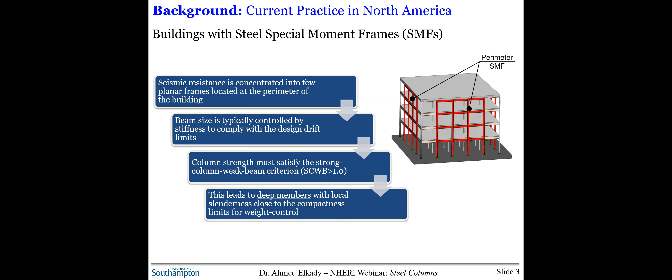Now, these column cross sections typically have depth larger than 16 inches. So we typically see W24s and W30s. And these all have large in-plane moment of inertia, as we want. At the same time, to economize on the steel weight, we select cross sections with local slenderness close to the compactness limit for highly ductile members, as per the seismic provisions. And to give you an estimate, roughly the web slenderness would be 40, and the flange slenderness would be close to 7.

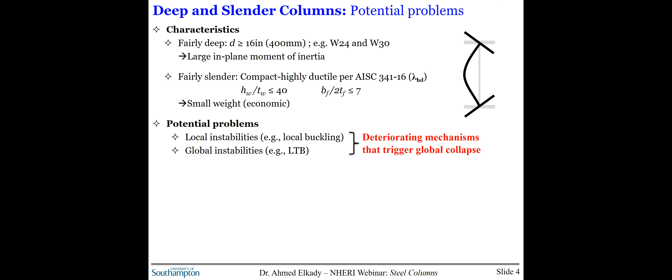Now, because of these characteristics, potential problems may occur, including local instabilities and essentially the early occurrence of local buckling and how fast it progresses. At the same time, global instabilities can take place, such as twisting and lateral torsional buckling. And these are all deteriorating mechanisms that we don't like to see, since they trigger a global collapse.

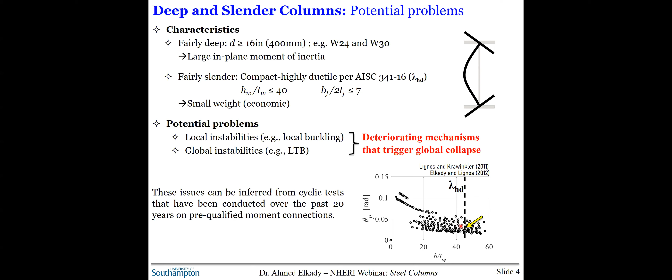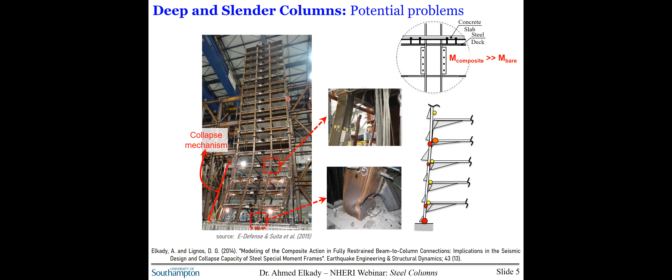In the same time, subassembly tests also showed that once the beam buckles, the lower flange tends to kick out of plane, exerting twisting and out of plane bending demands on the column. Again, this can be a critical issue given the column's geometric properties that I just mentioned.

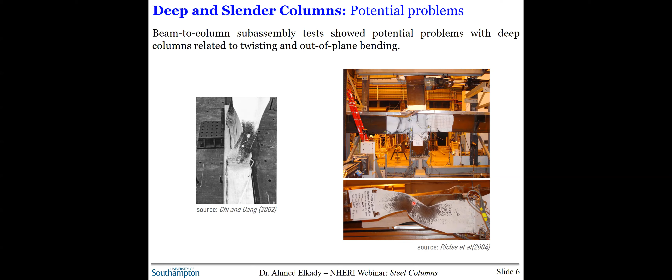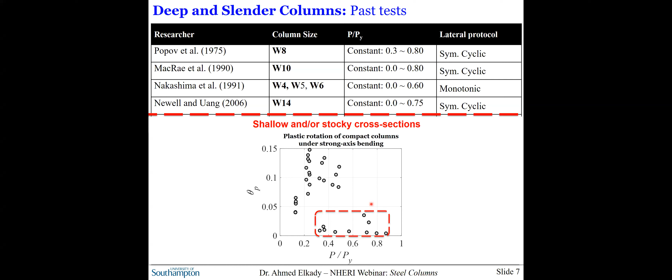In the past 5 years, there have been several testing programs on steel columns. In today's presentation, I will present the findings from 2 of those testing programs.

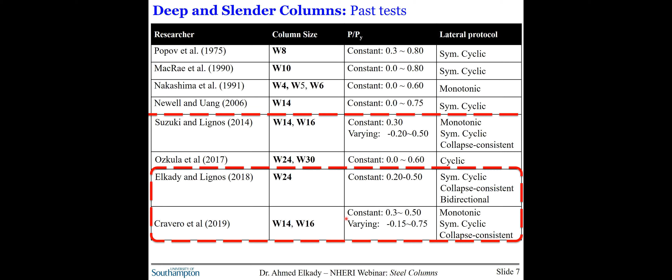Now, the research scope is essentially to investigate the cyclic behavior of deep columns through experimental testing and complementing this with numerical simulations. The specific objectives are to reassess the seismic local compactness limit, as well as the global slenderness limit for highly ductile members.

Also to develop updated force deformation relations for the nonlinear modeling of steel beam columns, and this was part of the ATC 114 project. We also would like to quantify key column response indicators, such as the plastic hinge length and the amount of axial shortening resulting from local buckling.

So the first phase of the research, and the first part of this presentation, comprises 2 testing programs, one conducted at full scale and the other at larger scale, for a total of 24 column specimens. Looking at the cross-section space for wide flanges, for the testing, we started by selecting representative column sizes. So for the full-scale testing program, based on code-compliant archetype mid-rise steel office buildings, we chose W24x146 and W24x84 to be tested.

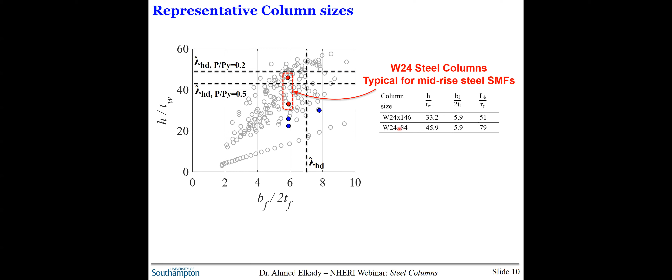For the larger scale testing, we selected 3 sizes from W14 and W16 as shown here. And these are equivalent to the moment frame columns in mid-rise steel buildings, but at a 2/3 scale. Probably you already noticed from this plot that the main geometric parameter that we are varying here is the web slenderness ratio. And essentially, we found this to be the parameter with the most impact on the cyclic behavior of the column based on an exploratory numerical assessment.

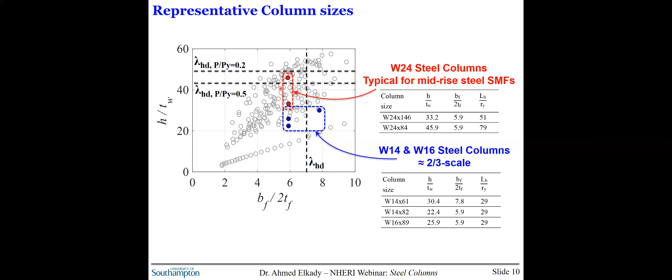Now, the dependency of structural component behavior on the loading history applied to it is already well established in literature. So in that respect, we aimed to employ a range of loading scenarios in these testing programs. For lateral loading, we applied both monotonic and cyclic lateral drifts. For cyclic loading, we used the standard symmetric ramped AISC protocol, the one typically used in literature to test different structural members and also used for the pre-qualification of beam-to-column connections.

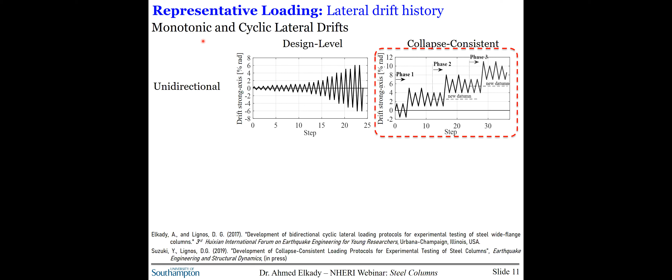Understandably, this protocol may be appropriate for drifts up to 2%, but it's not representative of drift demands at large seismic intensities. And for that reason, we also used what we call a collapse consistent protocol that represents pretty much the asymmetric drift demands under strong earthquakes that induce collapse. And lastly, based on three-dimensional nonlinear analysis, we developed equivalent bidirectional protocols shown here that statistically represent the bidirectional drift orbits using these elliptical orbits that you see over here.

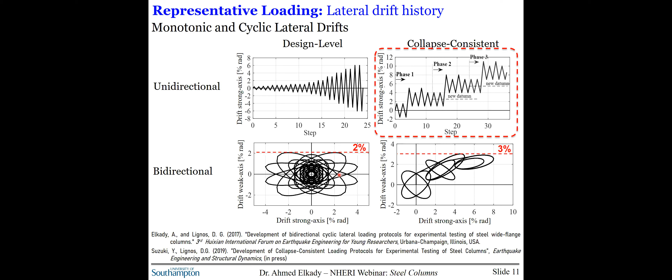Likewise, based on system-level analysis, we evaluated the column axial load demand. Essentially, if you are looking at interior columns, you will see that the axial load demand is the one induced by the gravity load, and it remains more or less constant during shaking. Typically, about 20% of the column axial yield strength, which is what we call here PY, is what you find in interior columns. If you are looking at exterior or end columns, you will see that they experience varying axial loads due to the overturning of the building. And the range of this variation depends on the seismic intensity and the building height, among other factors.

So based on this evaluation, we chose a number of constant and varying axial load ratios to employ in our test. If you look here, the varying axial load essentially includes a constant component representing the gravity offset, or what we call PG. And then you have a transient component representing this variation due to the overturning moments. And for the constant axial load, we went from 20% PY up to larger axial load levels of 75% PY, which may actually be representative of columns in older constructions.

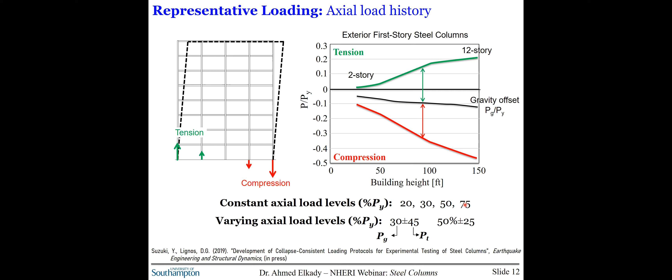A brief word here about the instrumentation. In addition to the standard force displacement acquisition that we typically do in such tests, it's worth noting that we installed a large array of strain gauges, about 54 gauges per specimen. And this is to capture the neutral axis shifting in the cross section, to track the extent of plastic strains at the column end, and also to track the location of the flexural inflection point throughout the test. We also use a wireless tracking system to measure the out-of-plane deformations and the twisting of the column along the height.

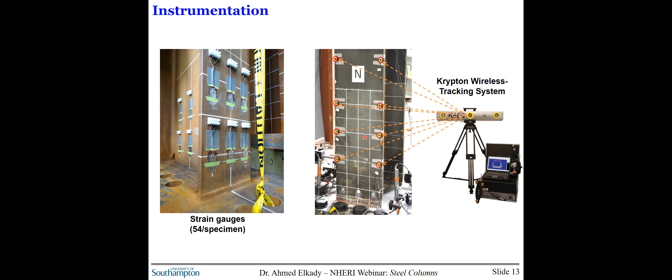In this one, we subjected the columns to monotonic and cyclic drifts. In monotonic loading, we reached large drift levels of 15%, so we can characterize the behavior up till these large levels of drifts. At the same time, the drifts were coupled with high constant and varying axial loads, reaching 75% of Py, which provided a unique data set, as I'll show later on.

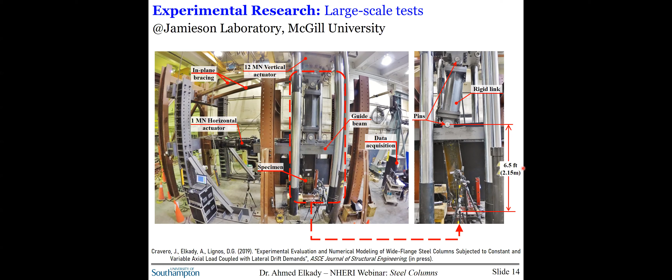In this slide, you will see a video of the damage progression in one of those tests from different angles. Essentially in this specific one, the column is subjected to cyclic symmetric drifts and varying axial load. So when we are pushing to the right, the axial force increases, and when you are pushing to the left, the axial force decreases, and in some excursions it goes to tension. Based on this, you will notice that when you go to the tension excursion, the local buckling developed in the left flange tends to straighten once you apply tension to the column.

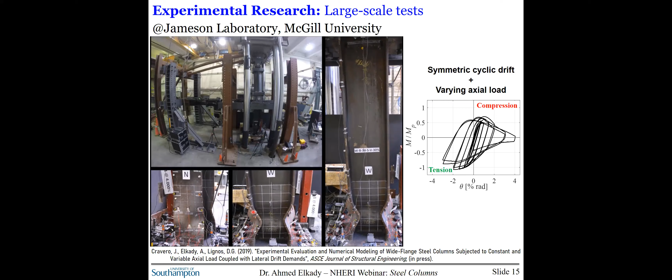The second testing program was conducted also in Canada at the Structural Laboratory of École Polytechnique de Montréal. This one involved 10 full-scale 13 feet, or about 4 meter long specimens. We were actually fortunate to use this unique 6 degrees of freedom control system that you see over here, that was brand new at the time of testing. For this, I would like to acknowledge the assistance and support of Professor Robert Tremblay of EPM and the lab staff over there.

Basically, this system consists of a total of 8 actuators connected to this top platen. This enabled us to apply bidirectional drifts at the column top and to simulate also realistic boundary conditions. As you can see here in some of the tests, we applied predefined rotation at the column top to simulate the flexibility of the top beam to column joint.

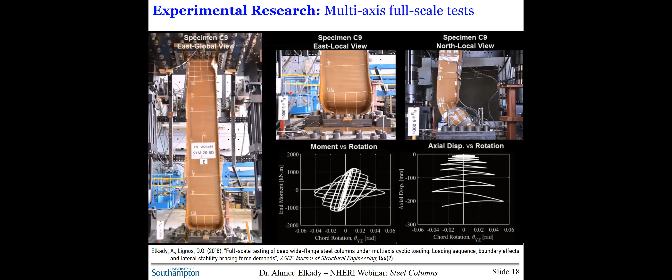This is another video of one of those columns. This particular one had W24x84 cross section and was subjected to constant axial load in compression and bidirectional drift with a flexible top end. Here you will actually see that we are controlling 4 degrees of freedom simultaneously.

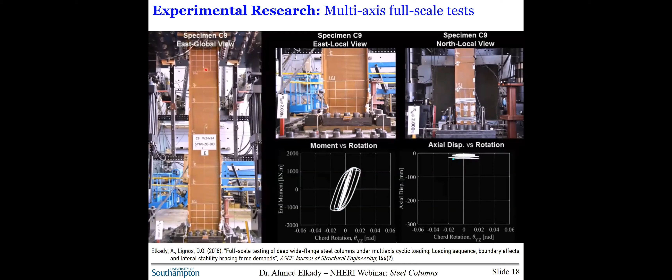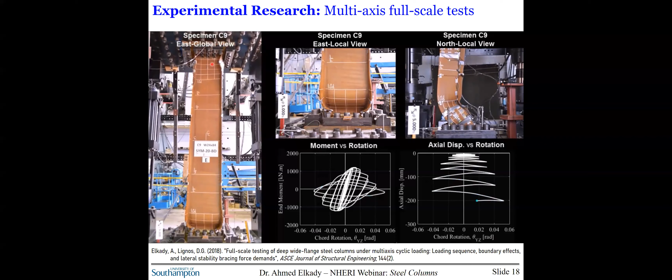What you probably will notice in this video is that the plastic deformation will form first at the column base, the fixed end pretty much. Once local buckling starts occurring at the base, which is right now, and damage starts to progress, the inflection point will start to push downward and the moment demand will increase at the top, and eventually the top end plastifies under further loading. You can also see here what's happening in the out of plane in terms of deformations and twisting.

Now, due to the time constraint, I will show you selected observations and findings from these tests, but please feel free to refer to the original publication shown here for the full details. The same applies for the rest of the things I'm showing in today's presentation.

As you probably observed in the videos, the primary failure mode is local buckling, the progression of which resulted in appreciable amount of column axial shortening, reaching around 50 millimeter or about 2 inches at 3% drift. What's more interesting is that at drifts larger than 2%, local buckling at the base plastic hinge was coupled with out-of-plane instabilities in the form of out-of-plane deformations and twisting of the member.

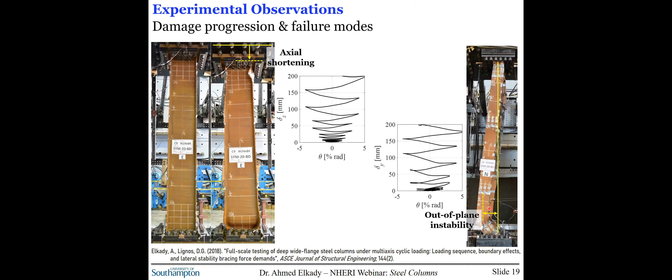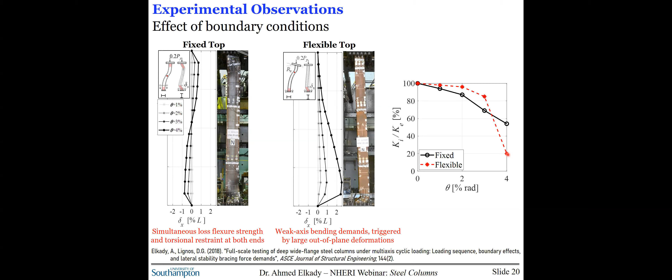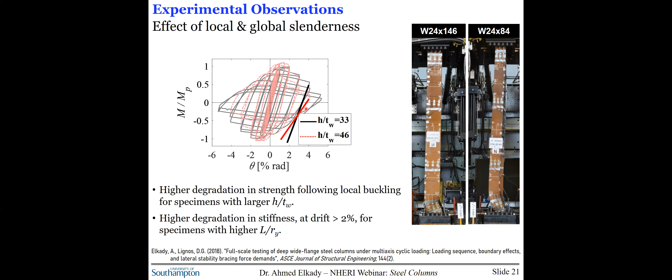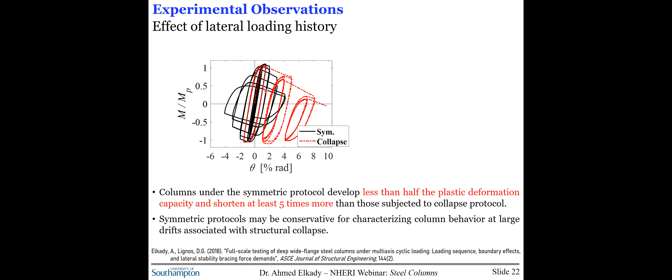To further demonstrate the effect of the loading history, you can see here the different responses of an identical column under the symmetric and the collapse-consistent protocols. And you probably can see the difference here. Basically, due to the large number of inelastic cycles of the typical symmetric cyclic protocol, damage progresses faster in this case. And to quantify things, you will see that columns under the symmetric loading protocol develop less than half the plastic rotation capacity and shorten at least 5 times more compared to those subjected to the collapse protocol, which tells you that symmetric protocols may actually be conservative for characterizing column behavior at large drifts associated with structure collapse at large seismic intensities.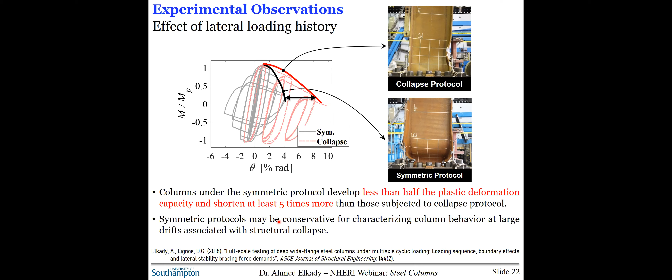We also observed larger rates of cyclic deterioration, specifically at drifts larger than 3%, when we are looking at columns subjected to unidirectional and bidirectional loading. So by looking at this comparison, you will see that essentially under bidirectional loading or biaxial bending, there is a higher rate of deterioration in the strength, especially when you go to large drifts. At the same time, because you are pushing at the top out of plane, you are getting additional weak axis bending, and you are getting larger out-of-plane deformations, and eventually you are getting higher deterioration in stiffness.

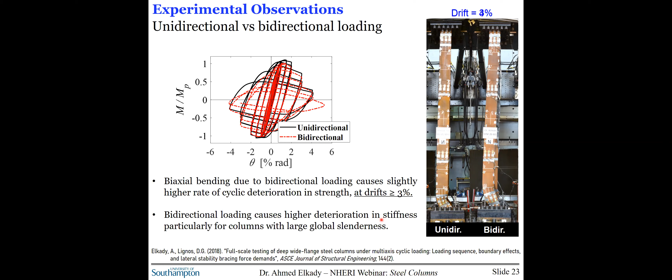It's worth showing here that this unique setup actually enabled us to evaluate and quantify the out-of-plane force at the column top, where you typically would have bracing. So essentially what we observe is that members that have larger member slenderness or global slenderness, L over Ry, will develop lower out-of-plane forces. And the thing here is that the stockier columns tend to buckle later and develop larger amounts of cyclic hardening. And eventually this tends to exert large out-of-plane forces at the top compared to the more slender columns. So again, these are all unique data that has not been measured in prior testing programs. And this also can be used to evaluate the bracing design provisions in the steel specifications, for instance.

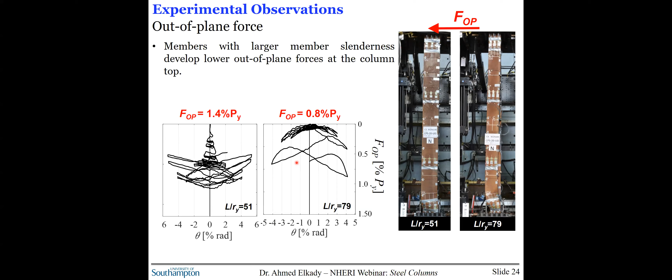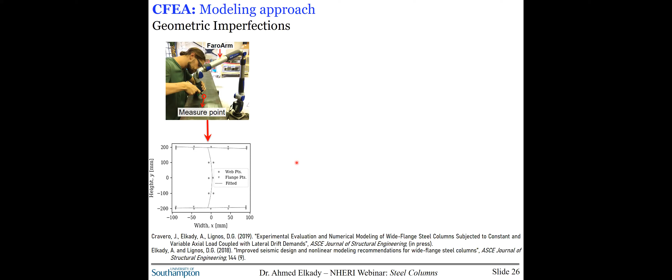The second phase of the research involved the parametric continuum finite element simulations to generalize the test findings and to fill the gaps within the experimental data pool. First, we had to develop a robust finite element modeling approach that is defined in an objective manner and that's not biased by test-specific calibrations or model tuning, etc. So this was done systematically. First, we investigated several column members by measuring the local and global geometric imperfections that are a product of the rolling process. These mean imperfection values are then deduced and considered in the finite element model.

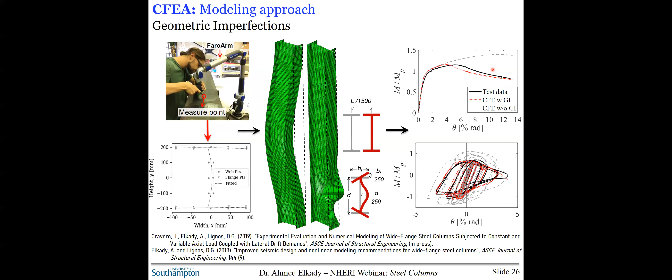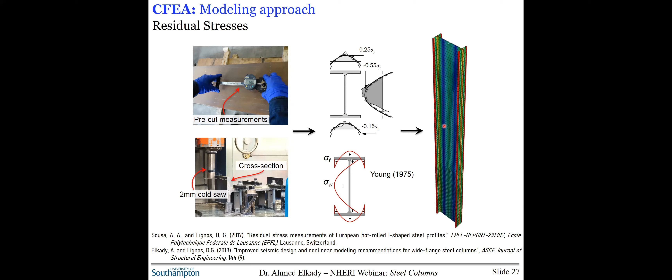Probably the most important part in the model definition is the material model part. And here we used the nonlinear model with isotropic and kinematic hardening that you typically use if you are using any finite element software like Abaqus or ANSYS or such. To properly obtain the hardening material parameters of this model, we had to conduct carefully executed monotonic and cyclic coupon tests for the calibration.

Actually, here you can see some comparisons with the coupon test and the calibrated material model. I would like to note that this material model, along with the recommended values for the parameters for the different steel grades, has already been implemented in OpenSees if you're using it. So please feel free to check this model and maybe use it in your fiber models and such.

So in summary, all these modeling specifics and definitions make the modeling approach independent of the section size, independent of the loading history, independent of the axial load that's going to be applied and so on. So in that sense, it can be generalized to any scenario.

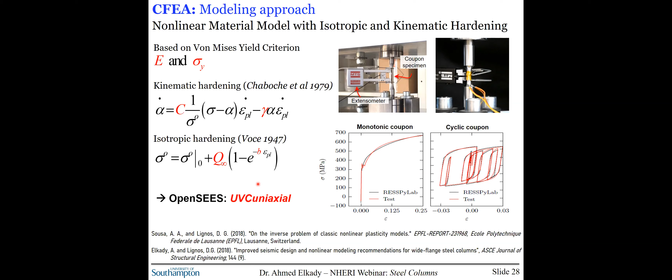Essentially, we did rigorous validation for this modeling approach with test data that I just showed, and also with test data available in literature from other researchers. As you saw here, we were able to capture the right instability modes, the moment rotational response, and the complex progression of axial shortening due to local buckling.

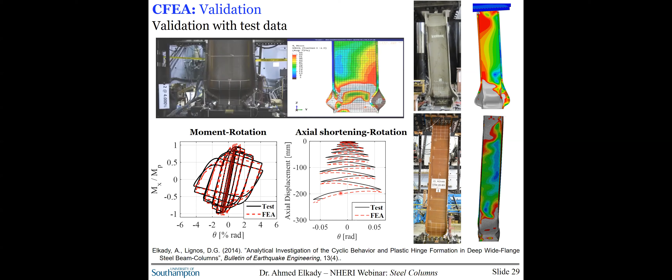Talking about validation, it's also worth noting that this approach was further validated through the blind prediction contest organized by NIST and ATC last year, based on the full-scale column test conducted by Professor Chia-Ming Uang at UC San Diego.

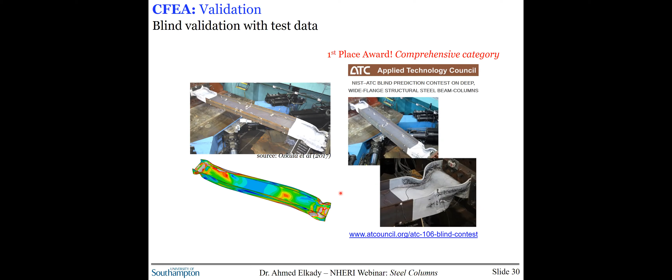Now, as part of the ATC 114 project, we used this model to parametrically investigate the behavior of a typical 15 feet long first story column with flexible boundary conditions at the top. The parametric space included 60 wide-flange cross-sections, from shallow to deep cross-sections, 3 different lateral loading protocols, 5 levels of constant compressive axial loads, which adds up to more than 1,000 simulations, more or less.

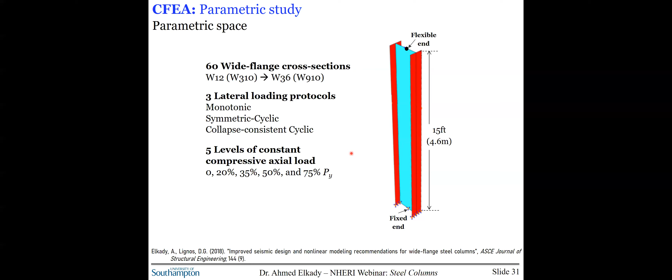Now, using the data from these simulations, we were able to develop seismic design recommendations. Essentially, we used the simulated responses to extract many response data related to the rotational ductility, the strength, and the stiffness deterioration. For instance, we evaluated the rotation at which you lose 20% of your plastic moment capacity. And based on all these parameters, we were able to propose improved design recommendations for better ductility and stability in steel columns.

Specifically, our target performance in this case was at 4% drift, where we need to limit the strength deterioration to 20% of Mp, limit the stiffness deterioration to 50% of the initial elastic stiffness, and also limit the amount of axial shortening to 1% of the column length, which is roughly about 1 inch.

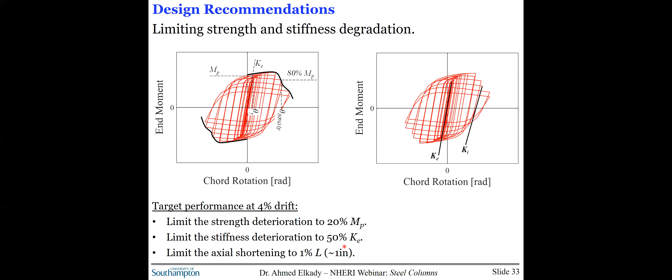So the recommendations included a refined upper limit for the column local slenderness, and essentially we proposed to push the current limit by 2/3 to the left, as you see here. This is the limit for highly ductile members, noted as lambda_hd. At the same time, we proposed an upper limit for the gravity-induced axial load of 30% Py, and an upper limit for the global member slenderness of 80. Again, these are all to achieve the target performance that I showed earlier.

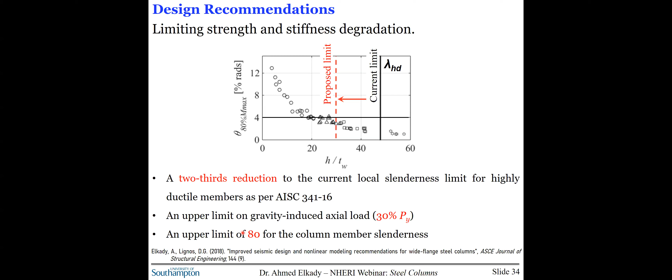But given that you have the data, you can target any performance criteria that you would like and see which cross sections or limits on the loading you need to induce.

Using the parametric data, again, we were able to conduct regression analysis and develop equations to predict key column response indicators. This includes, as you see here in this slide, the length of the plastic hinge region at the column base. This regression equation essentially captures the fact that stockier cross sections, the ones with a stockier web, in this case h/t_w, will develop a larger plastic hinge length compared to a more slender column, due to the fact that local buckling is delayed and a large amount of cyclic hardening is developed that keeps propagating plastic strains to higher elevations.

Also, the same equation captures the effect of the axial load. Essentially, once you get higher axial load, the second order P-delta moments tend to push the plastic strains again to a higher elevation, and you start getting larger plastic hinge length. Now, such an expression can be very useful when you are discretizing column regions, for instance, as part of a fiber-based modeling approach. It can also be useful in seismic design when you are trying to allocate or design the supplemental bracing, for instance.

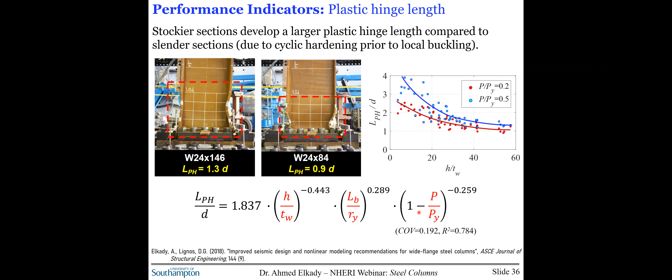Again, with performance indicators, we also developed another expression to predict column axial shortening. The main controlling parameter in this equation, along with the web slenderness and the axial load, is the cumulative plastic rotation that the column experiences. And this parameter essentially makes this expression usable for any loading history. So again, this can be very useful when assessing structure performance at the system level or when evaluating column damage and the associated losses.

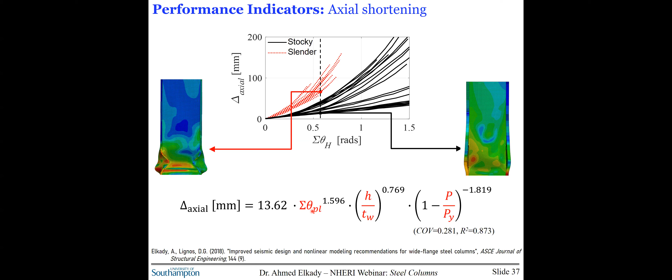Now, moving over to the development of nonlinear numerical models for steel columns that are commonly used in engineering practice. Basically, we need such models to conduct static and dynamic analysis as part of the performance-based engineering framework. And the ASCE 41 standard historically provided such modeling guidelines.

The 2013 issue was the standard at the time of the testing and the time of the study, before being superseded recently by ASCE 41-17. Essentially, in both documents, for steel moment frame components, ASCE 41 provides you with this generalized force-deformation curve shown here, where a and b are the main plastic rotation parameters. The curve is supposed to represent the skeleton or the envelope curve bounding the cyclic behavior based on symmetric cyclic loading.

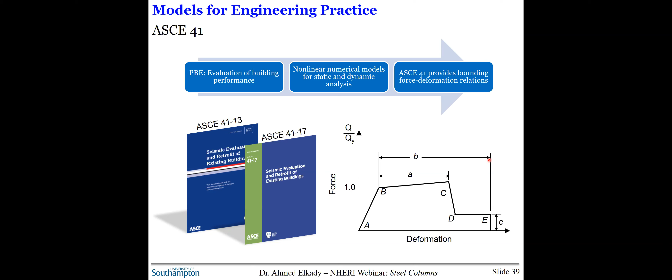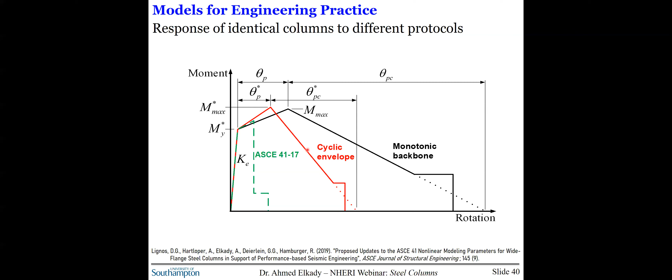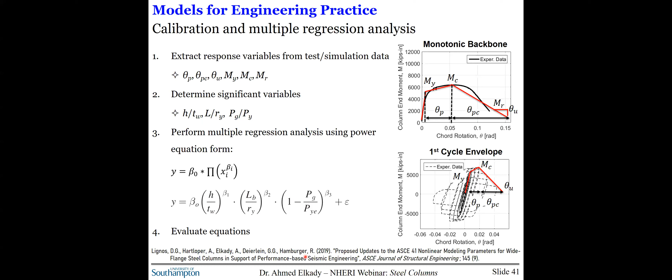In summary, the process involves conducting curve fitting to the test and the simulation data, followed by multiple regression analysis, and finally, regression equations are developed and evaluated. I will not elaborate further on this due to time, but you can always refer to the original publication shown here for the detailed statistical procedures.

Here are, for instance, the equations for the proposed first cycle envelope curve. And some of the key updates here is the fact that instead of providing constant rotation values based on discrete bins of slenderness ranges or loading ranges, these equations capture the variation and the change in all the parameters for all ranges of loading and geometric values. So it doesn't lump together different cross sections in the same bin. Otherwise, you are getting here the full variability in the parameters.

The model also captures the variability in the post-yield slope with respect to the column parameters and the loading, the axial load. And this is compared to the constant slope that's used in ASCE 41, which is 3% of the elastic stiffness. So here you can capture this variation in this slope. At the same time, rather than having a sudden drop in your moment-rotation curve once you reach your capping strength, which is the case in ASCE 41, here the model captured the gradual post-peak slope or post-local buckling slope, which actually can also help with the numerical convergence issues when you are doing analysis. But most importantly, it captures better the overall behavior of your component.

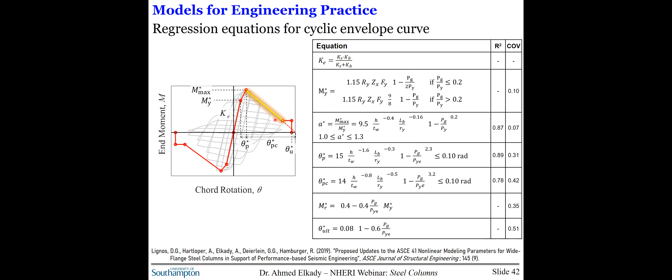As part of these numerical models, we also had to reassess the axial load limit at which a column can be considered a force-controlled member, which means it has no plastic rotation capacity. Essentially, in the previous ASCE 41 standard, the limit was about 40% of Py. So beyond that, you will need to consider your column member to be elastic, and essentially it loses strength right after it yields. But this can be fairly conservative in light of the current data that we have. So by looking at the value of plastic deformation with respect to the axial load, we found that the limit can be relaxed to 60% of Py, which is actually the limit used in the current ASCE 41 standard, ASCE 41-17.

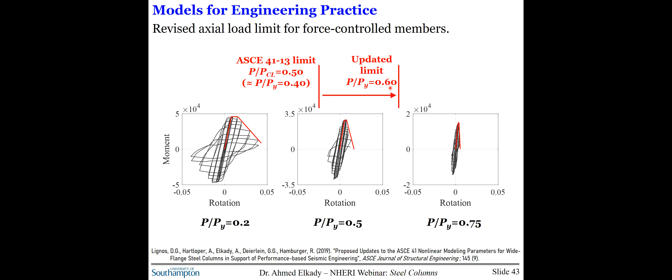These are a couple of illustrative test data comparisons with respect to the first cycle envelope that we proposed. Also in the same plots, we superimposed the same envelope curve based on the previous and current ASCE 41 standards. And these are for two specimens with different axial load levels under symmetric loading. As you can observe here, ASCE 41-13, the previous version, used to overestimate the elastic stiffness. And this is due to the fact that the contributions of the shear deformations were not included in the computation of the elastic stiffness. And this contribution actually can be substantial. It can easily reach about 20% in deep columns. And now this issue has been resolved in the current ASCE 41 standard.

Also, with the previous standard, as I just mentioned, for a column subjected to 50% of its axial yield strength, you would consider this cyclic envelope curve, where essentially you have the elastic region, and then you drop right away in strength because you don't have plastic deformation, which is a force-controlled limit. Again, this has been revised as I just showed. With respect to the current ASCE 41 standard, again, as I mentioned, the proposed model overall appears to fit the test data better. For instance, the post-yield hardening slope and the gradual decrease in the flexural strength in the post-buckling region reflect the actual behavior better.

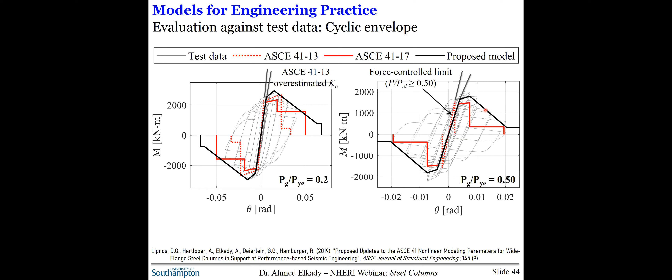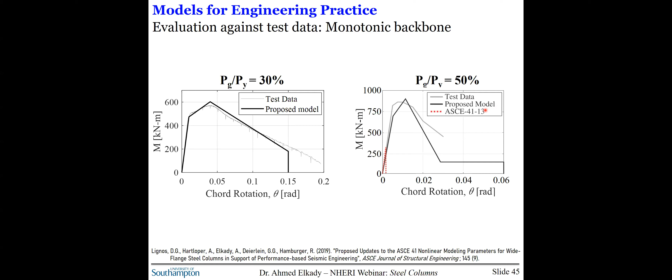This is the same, again, these are all some evaluations showing good agreement between the proposed monotonic backbone curve and the test data at different axial load levels. I mentioned that these monotonic backbones can be used with phenomenological component models that simulate cyclic degradation, strength, and stiffness.

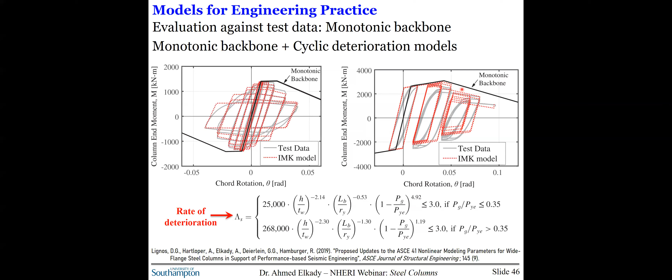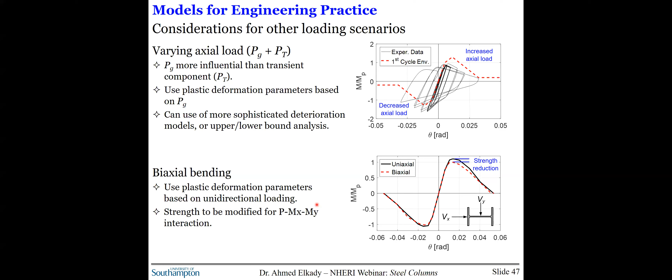So I'm close to the time. The last thing I'm showing is the last part of the research, which is essentially the development of damage fragility functions. The development of such functions was feasible given all this new test data. And this can, of course, be used for loss assessment studies and such.

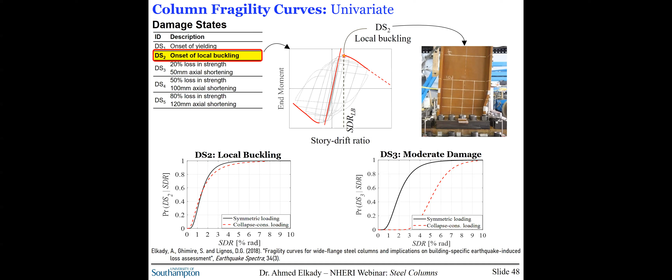We developed univariate fragility curves, as the ones you see here, that take into account the loading history effect. For local buckling, the difference between symmetric loading and collapse loading won't matter a lot. But after that, once local buckling progresses, the probability of damage changes substantially based on the loading history the column is subjected to. Also, to reduce the uncertainty associated with univariate functions, we used ordinal logistic regression analysis to develop more accurate multivariate functions that consider the loading and the geometric parameters of the column to predict the probability of damage.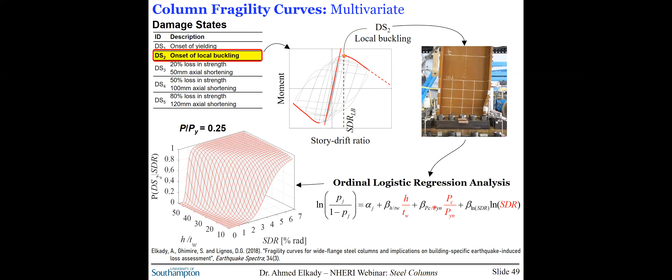Now, to summarize what I just presented, essentially, it's a coordinated testing, simulation, and numerical research based on validated continuum finite element modeling approaches and full and large scale testing. We used the data from this to develop seismic design provisions for improved ductility and stability in deep steel columns, to develop expressions for key column performance indicators, and to develop damage fragility functions to help with loss assessment studies. And we also provided guidelines for nonlinear modeling of steel beam columns with a new definition of the monotonic backbone curve that captures all these different phenomena that I discussed in the presentation.